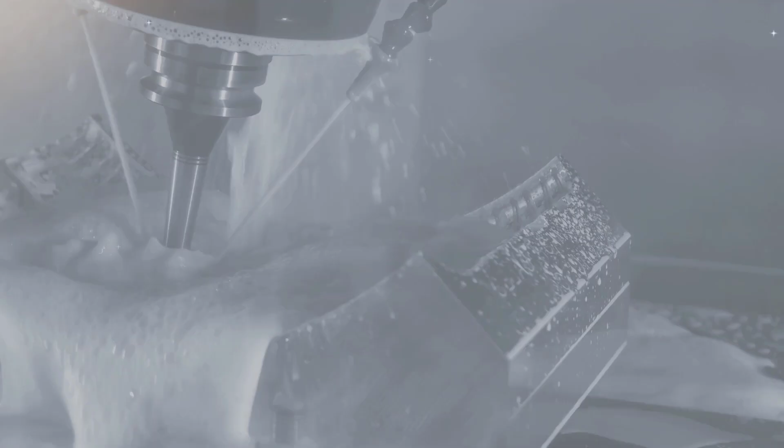My name is Stephen. Today we're going to explore the power of 5-axis machining in GibbsCAM. Let's get started. We're going to be looking at the 5-axis module today for simultaneous machining in GibbsCAM. Let's open up a 5-axis process to start.

Before I create a toolpath, we'll just look at the process dialog for the 5-axis module. This is the options tab. It has your speeds and feeds, and you can duplicate and rotate toolpaths, which CS you're going to be machining in. GibbsCAM 5-axis supports 3D cutter radius compensation, so you can adjust the toolpath at the machine for size.

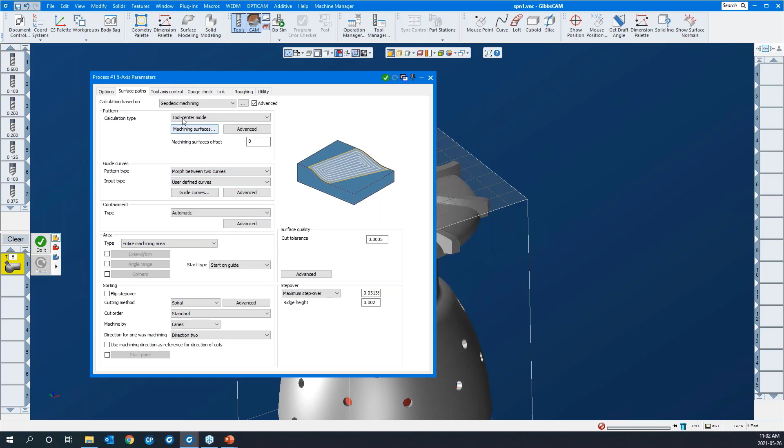If I click on the surface paths, you'll see that GibbsCAM is very graphical in the 5-axis module. Any field I click on, a diagram appears to let you know what the system is expecting. And that's right across the board, almost any field you click on. So it's very graphical, and it's a joy to use.

Okay, you'll notice I'm in tool axis control, and we'll be machining in full 5-axis simultaneous. You can also go 4-axis simultaneous, or you can lock both rotary axes and machine in 3-axis as well, in XYZ. So we'll be looking at that as well.

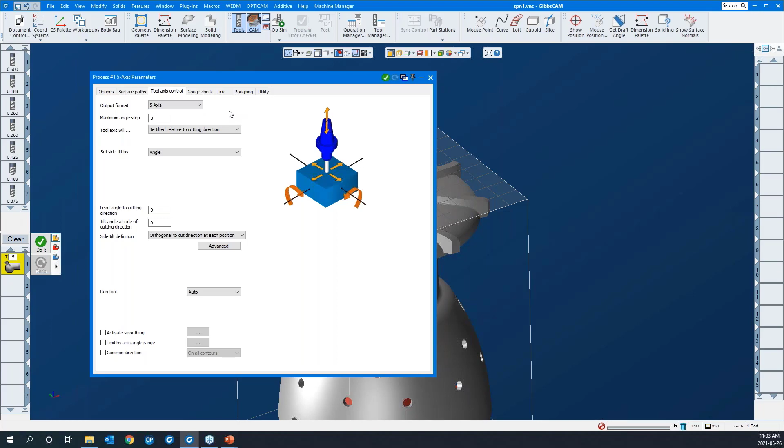Also, there's a lot of power to the 5-axis simultaneous machining strategy in GibbsCAM, and a lot of depth to it. If I just go over my calculation based on, if I'm selecting surfaces, there's a series of sub options here for different toolpath options.

If I select triangle mesh, you'll see there's another subset of toolpath options. And if I go to wireframe, you'll see likewise. So there's very many options here, okay? And we're going to cover a few of them here today.

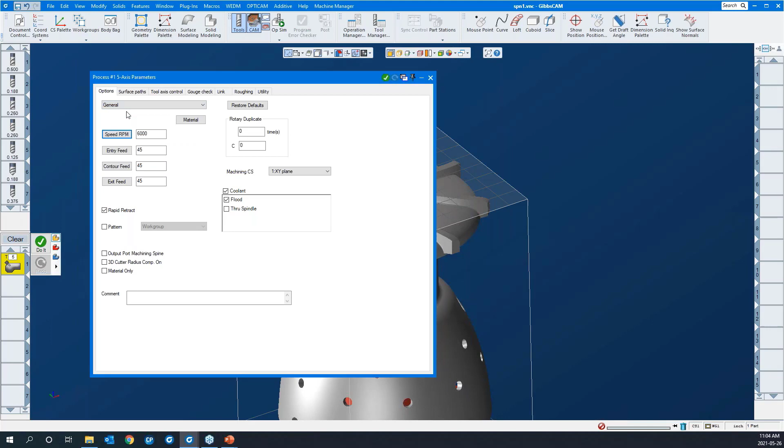If I go back to options, you'll see there's a whole other set of toolpath options here as well. There's point 5-axis strategies, and we'll look at least the drilling one today. Let's go ahead and create a toolpath. Okay, so our options tab is good.

We're set like this. I'll go to surface paths, and I'll select surfaces to start. We'll go morph between two curves. I'll just select the first curve like so. And I'll say, okay, the second curve

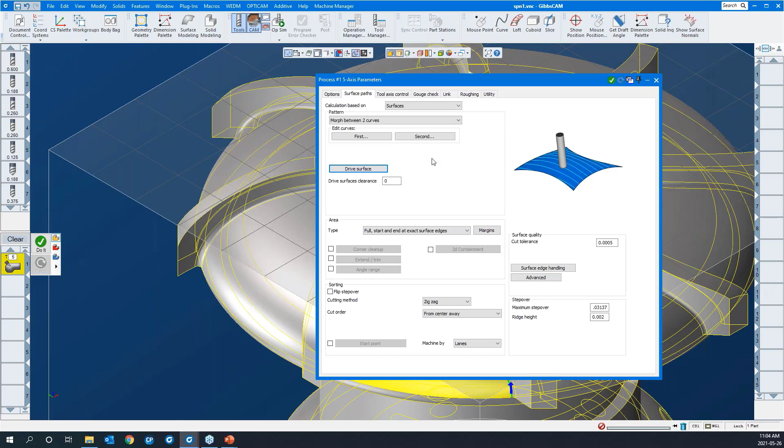will be in here. And then the drive surface, the surface we're actually going to be machining, is this one. So those morph curves are containing the toolpath, and we're going to be machining onto the yellow surface here. Start and end at exact edges, meaning the tool is going to travel right up to these morph curves that we've selected. But if we did that, it would perhaps overcut.

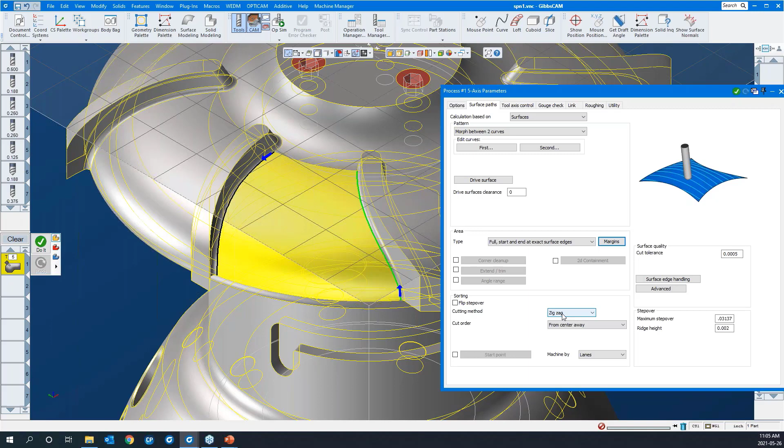So we can go to margins and add the internal tool radius, which is the radius of the tool we're using, which in this case is an 1/8" ball mill. So that'll shift the toolpath over by that amount. We're going to cut a zigzag toolpath, and we'll just use a standard. So it'll go from the left or right based on our decisions.

There's the machining tolerance. We'll keep the step over rather coarse while we're developing toolpath. It'll calculate quicker. And once we're happy with the toolpath, we can tighten up our step over to create a nice surface finish. In tool axis control, we'll select full 5 here.

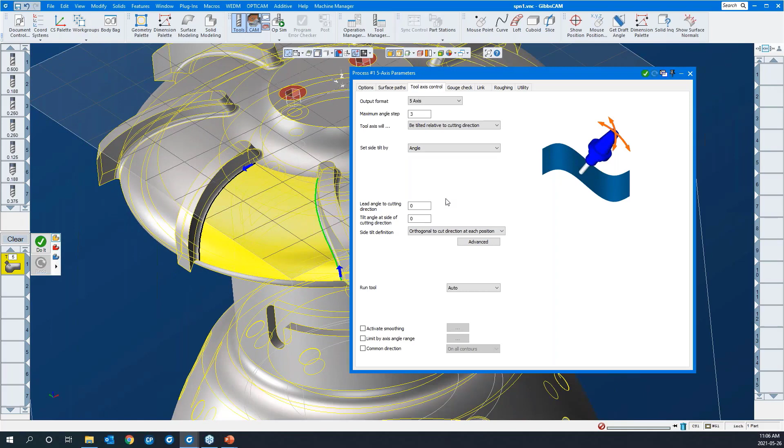There's dozens of options to control the tool axis in relation to the surface it's cutting. By default, the tool axis wants to stay perpendicular to the surface it's cutting. And for many reasons, you can alter that by adding a lead or a lag angle or a side tilt as well. And we'll discover them as we go.

The gouge check protects the part from the flutes where required, or the shank of the tool, or the arbor as well. We'll come back and look at that where required. We typically only apply gouge check strategies once the toolpath is created and we see that there's a problem, when we need the tool to move away from any given feature.

The link tab is a very important part of the 5-axis module. These are important components of the toolpath. This is our first entry and last exit, okay? So the lead in and lead out. Gaps along cut are very important, okay? What is a gap along a cut? Well, this diagram kind of displays that.

And so if the system encounters a gap, do you want it to go direct or follow a surface, or it can blend the spline, or it can start retracting to different feed or rapid moves as well, okay? And then you can differentiate between a small gap and a large gap and have the system behave differently based on those. Another one that's quite important is these links between slices.

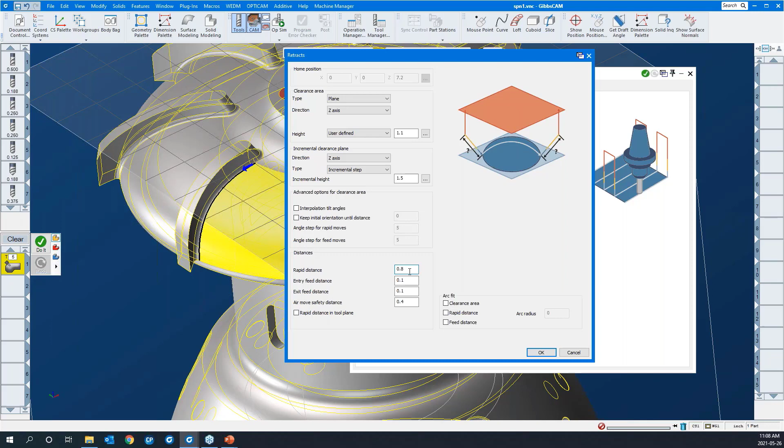Okay, again, you can differentiate between a small move and a large move. A small move, you may just need to follow the surface, but if it's a longer distance, you may want it to retract to a clearance area. So there's many different retract options, and they're all defined in here, the retracts, okay? There's clearance area, which is the initial clearance plane. There's also a rapid entry and exit, and then a feed entry and exit, and then a rapid distance here as well. Okay, and we'll explore these as we go forward.

There's also a roughing tab. By the way, in the link tab down here, links between passes, you can do multiple passes, and then the same options appear here for how to get the tool from the end of the first pass to the beginning of the second. It's grayed out right now because we don't have any roughing strategy selected. If we come here to roughing and click any one of these, go back to link, you'll see that it wakes this up. You can see the different pass levels here.

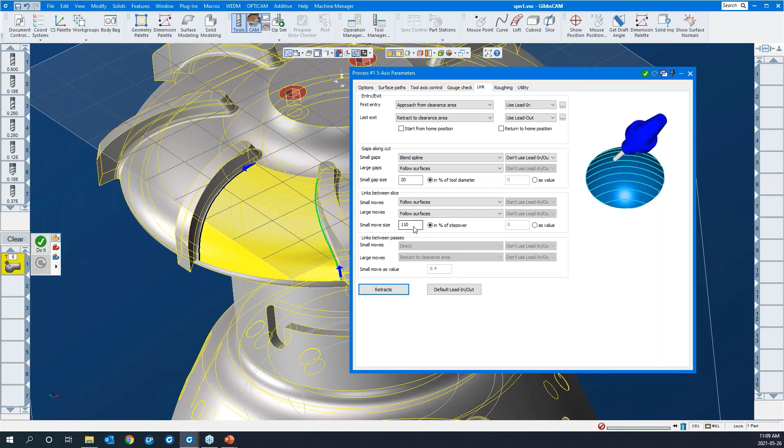Okay, so to create our toolpath, we have our edges selected. Yep, like so. We're taking 50 thou step overs. Our tool axis control was full 5. We had no gouge check strategies on. Our link tab, I was going to go links between slices. I was just going to say follow surface and follow surface in both instances. Let's go ahead and create that toolpath.

Okay, down here in the lower right is the progress bar. There's a little thumbtack there. I like to keep this open during my session so I can see how long it's taking for toolpaths to calculate. Okay, so there we are. You can see there's the shift from the edge. That's the internal tool radius.

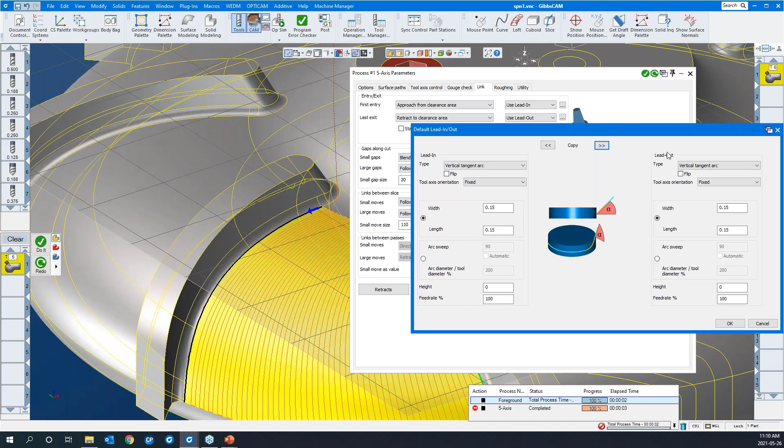We have a lead in and lead out option selected here, so I can modify those. If I go to the link tab, yes, we're using lead in and lead out. If I go to my default lead in and lead out, I can modify them here. Vertical tangent arc, I'll make them a little bit bigger like that, and I'll shift it over to the lead out just by clicking that button. I'll say okay, and we'll just hit the redo button. Okay, let's run the simulation here and have a look-see.

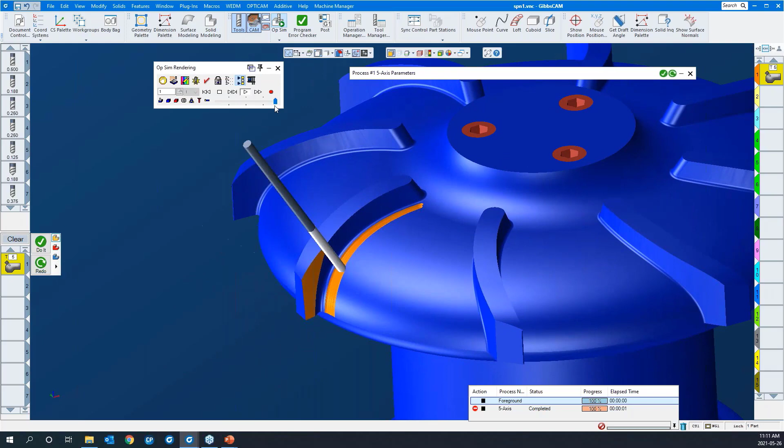And away we go. Okay, so this is OpSim right here. You can see right out of the gate that it has offended the blade there. Okay. And the step overs are rather coarse here. While we develop the toolpath, I'll keep the step overs rather coarse, and then we'll clean them up as we go. We'll see how it behaves coming up to the side of this blade here. Okay, so it seems to be clearing that one. This is our problem right now.

So we'll add a gouge check strategy here. I'll go to gouge check. I'll select it. I'll check the flute and shaft. Okay, there's three main gouge check strategies. Retract tool. You can retract the tool along the tool axis, along any of the machine axes, or from any reference point you choose. It's quite versatile that way.

Okay, the next main one is you can tilt the tool. You can use a side tilt, which is a tilt angle perpendicular to the travel of the tool. Or you can use the lead lag angle, which is along the length of the cut as well. Or you can let GibbsCAM take over and say, do automatic. Well, in our case, we'll go side tilt. We're gonna have the tool tilt perpendicular to the direction of cut. Okay, the parameters are, you can limit it to a maximum of 90 and minus 90. We'll just leave that as it is.

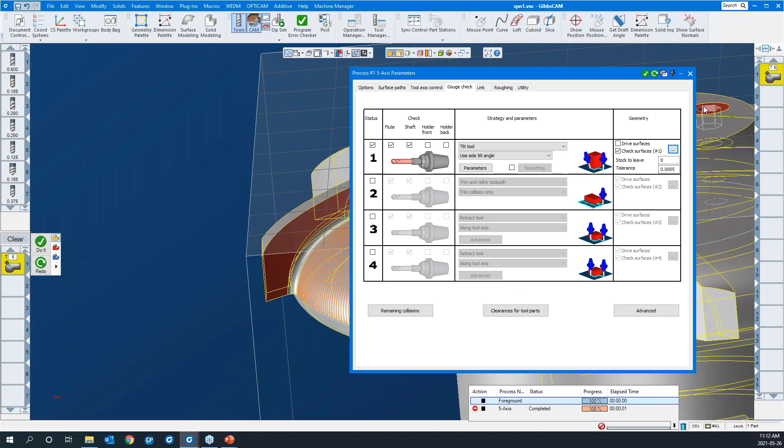What surface are we gonna check? I'll just pick here and select the surface we wanna protect, is that one. We'll say okay. And we'll leave an amount on there. We're gonna have it miss by, we'll say 50 thou. I'll say redo.

And you can see there's a little jog in the toolpath, and let's look at the simulation. See how that behaves. I'll slow it down a little bit, hit play. So it comes down and you can see the tool is actually missing there. Okay, while it's running simulation, you can single block it at any given time. You can put the tool holder on there as well.

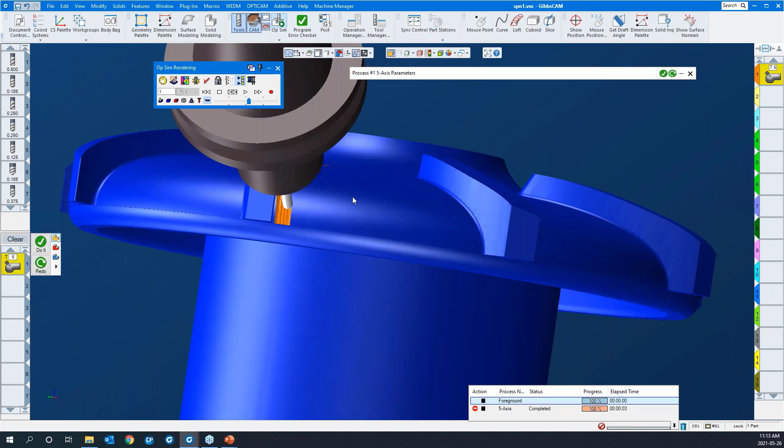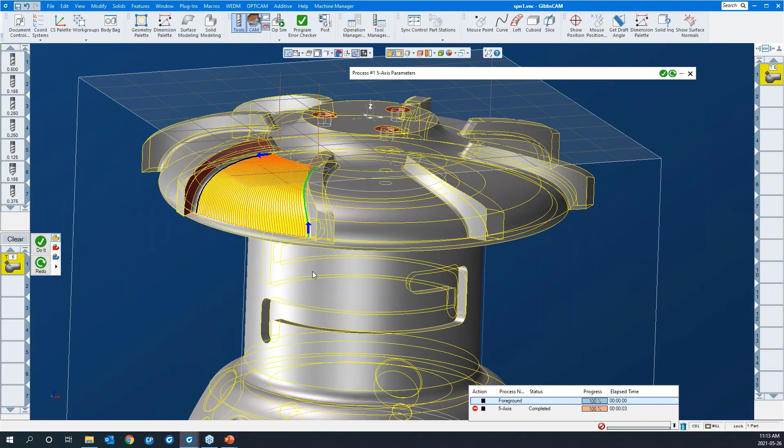Okay, and as we go through and I show you the 5-axis, I will describe some of the features available in OpSim and in machine simulation as well. Okay, so we're milling with the end of the tool here. A lot of the 5-axis module is end milling, but there's a very important component to 5-axis, and that's side milling. Swarf milling they call it, side wall axial relief feed. So let's do that. We will side mill one of the blades here.

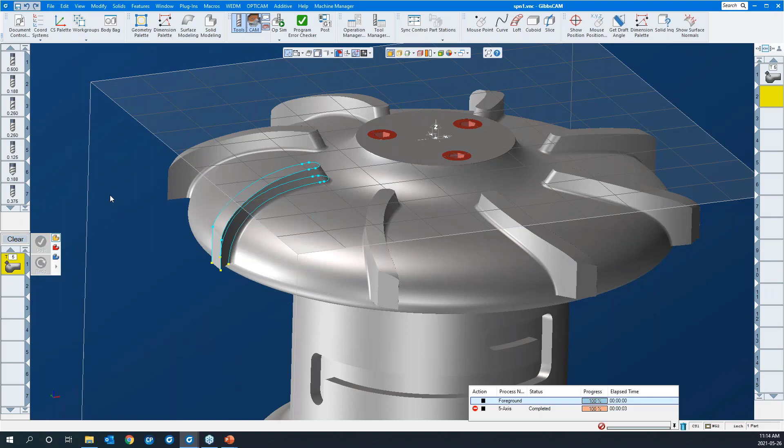Okay, in this last toolpath, I used the edges of the solid to select. You certainly can do that, but you can also use geometry that you have extracted from the solid. And I can do that in this case here. I'll create another 5-axis strategy. I'll use the same tool. Cutter comp is on by default. I'll turn it off until required. Surface paths. This time we're going to go swarf milling.

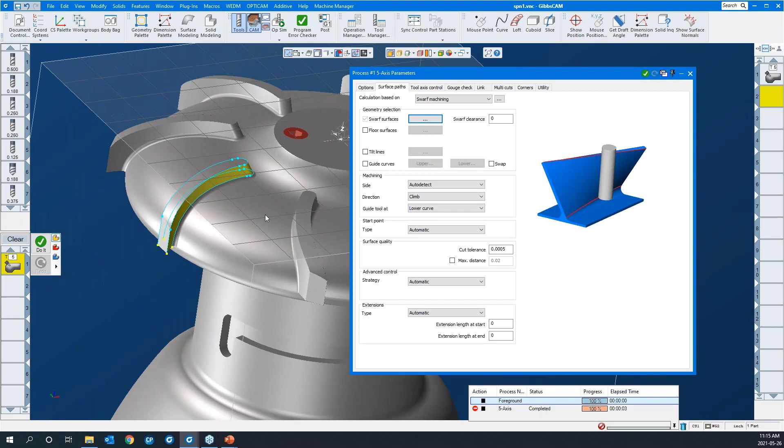Our swarf surfaces will be the walls of the blade. This one. Like so. I'll say okay to that. Okay. We'll use guide curves, which is the geometry. The upper curve will be the one on the top of the blade. And the lower will be this one. Okay. I'll say okay.

The system will auto detect which side of the surface it should cut on. It's going to guide the tool at the lower curve. The start point is predetermined. We can change that. There is our machining tolerances again. That affects the quality of your toolpath. Advanced control, we can let it go automatic, or in this case, we're going to sync the toolpath with the upper and lower curves. We can add an extension on the beginning and end of the toolpath.

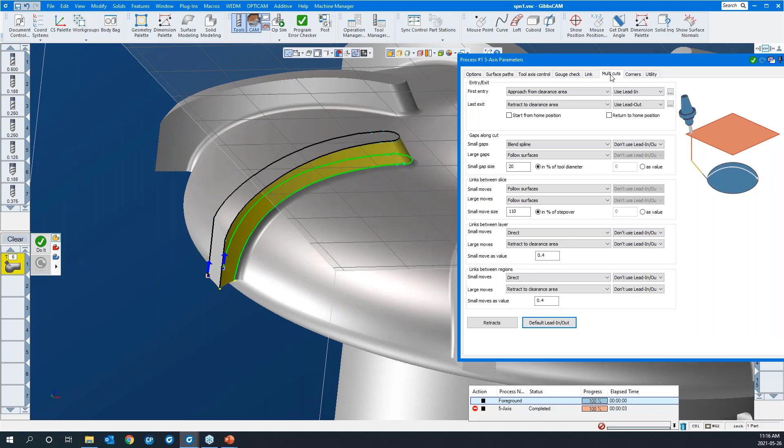We'll look at that. Under tool axis control, full 5, yes. Gouge check, we'll just leave it as it is. It's going to check the guide curves already. Okay, there's a lead in and lead out already defined here. We can remove them. If we say no lead in, lead out, you'll get an axial entry and exit. So just a straight line in. And you can do it in multiple passes. We're going to do it in one pass here. I'm going to say do it.

Like so. There's a clue when you're developing 5-axis toolpaths on the entry and exit line. These lines right here. With a bit of practice, you'll understand that this represents the axis of the tool. So it gives you a clue as to how the toolpath is going to approach and leave the cut. Let's have a look at this one. I'll just turn off the holder. Sometimes it's nice to have it. Other times it might impede your view a little bit.

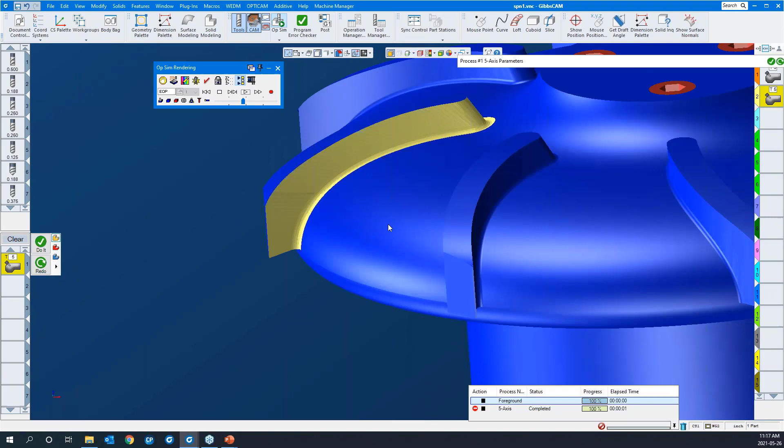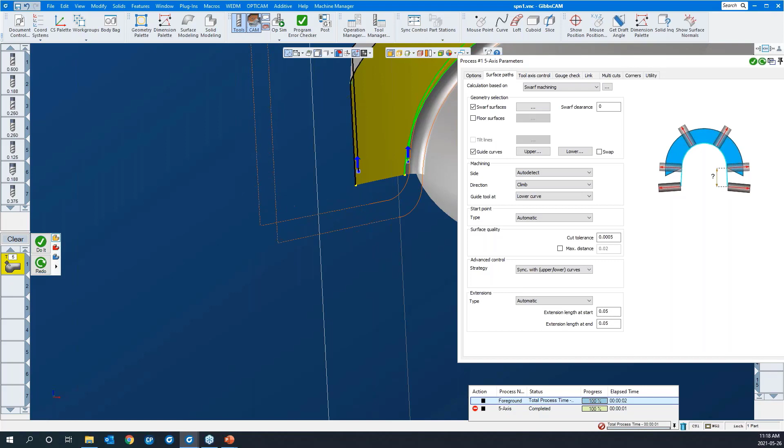Okay. You may consider extending the toolpath a little bit here. I'll go back to surface paths, extensions, the start and end. I'll extend it by 50 thou at the beginning, and that same 50 thou at the end. I'll just say redo. You can see the difference there. At any time, and I'll do it on the next toolpath, you can duplicate and rotate that around. There's no need to go around to each blade and do them separately. You do one and then you copy, rotate it around, like in other environments in GibbsCAM.

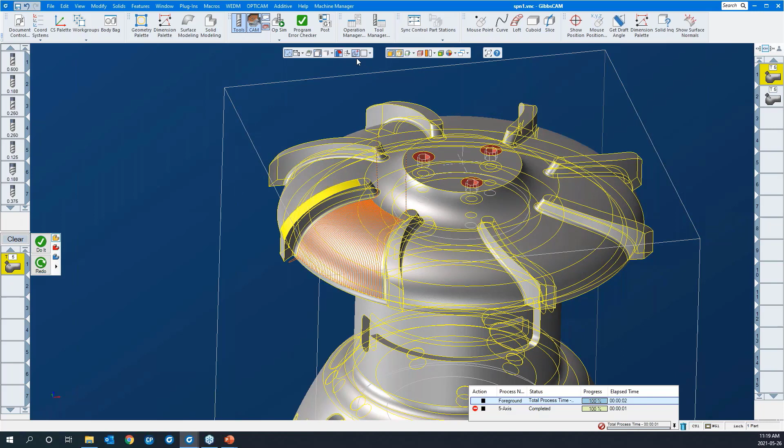Okay, let's go back to Op1. We were saying that it's a full 5-axis strategy, absolutely no problem. But you can also lock a rotary axis or lock 2. So let's look at reusing the data that we did for Op1 to cut the top of the blades. To simplify my view here, I can turn off the grid and the stock cube. Let's go in and modify the data in this process dialog to do some 3-axis milling. It's basically going to be a 3D toolpath option, XYZ. I'll go to surface paths.

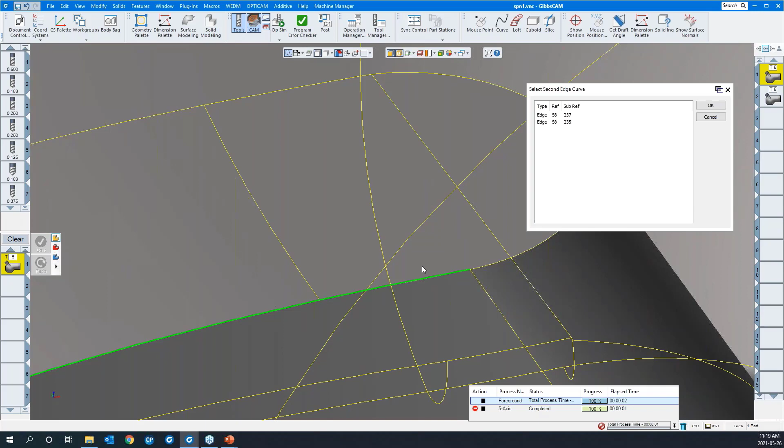And we'll select morph between 2 curves. Yes, the first curve will be this. And I'm picking wireframe from the solid again. The second curve, this one. Like so. The drive surface, or surfaces in this case, will be these 2.

We'll start and end at exact surface edges, except this time I'll remove the margin option so that the tool does go right to the edge and doesn't stay off it by the radius of the tool. I'll say okay there. We're zigzag machining. I'll set the step over to 25 thou. So you can do it by step over or by ridge height for surface finish considerations there. One drives the other.

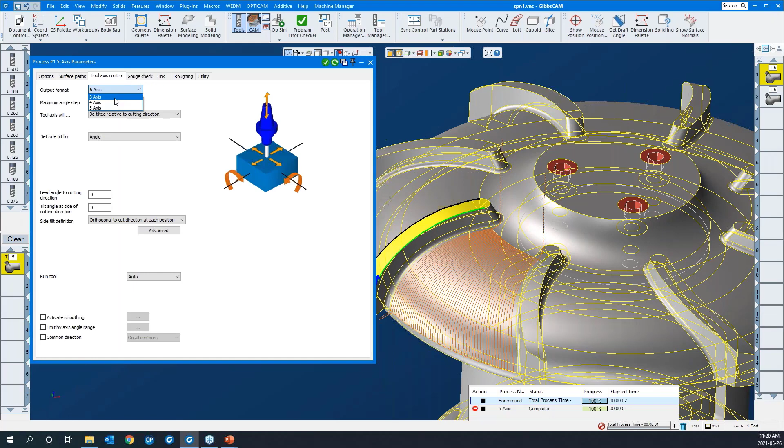If we go to tool axis control, we're going to take it down to 3-axis. If that's the case, you can machine from the XY plane. Or if you click other direction and you have a coordinate system created, you can pick the CS that you want the tool to approach from and cut on using this one. So in effect, it's 3+2 machining or 5-axis positional milling. We're going to go by the top, which is the XY plane, or CS number 1.

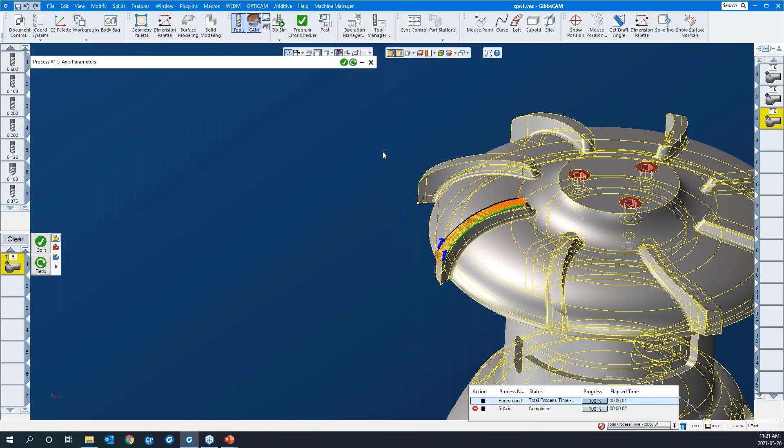Gouge check, until we need it, I will turn it off. The link tab, again, we'll leave them as is. We'll create the toolpath and come back and modify as required. At this point, I'm going to create the toolpath. I can watch it run here in my progress bar. It ran rather quickly. And you can see our toolpath here. First of all, you see that the tool is now exactly on the edge.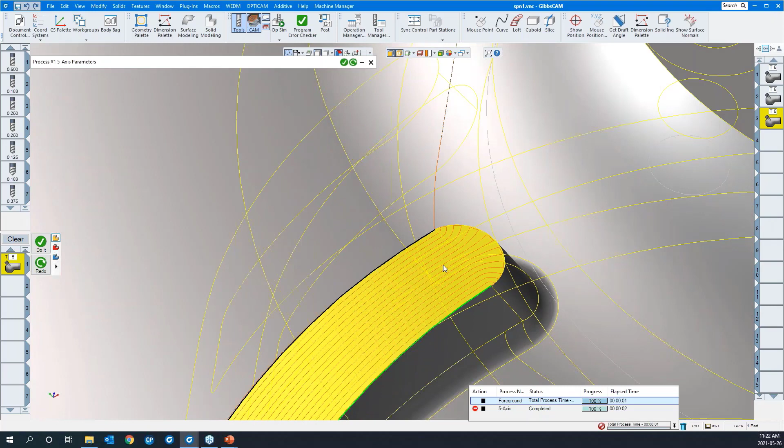I see a problem here where once the toolpath leaves the containment of these morph curves, the toolpath starts to flare out like that. So what we can do is we can virtually extend the morph curves to the end of the selected surfaces. So if I go to surface paths and surface edge handling, extend edge curve, and I'll say okay, and say redo. Okay, so that straightens that up pretty nice. If I go to a top view, we'll get a good look at that.

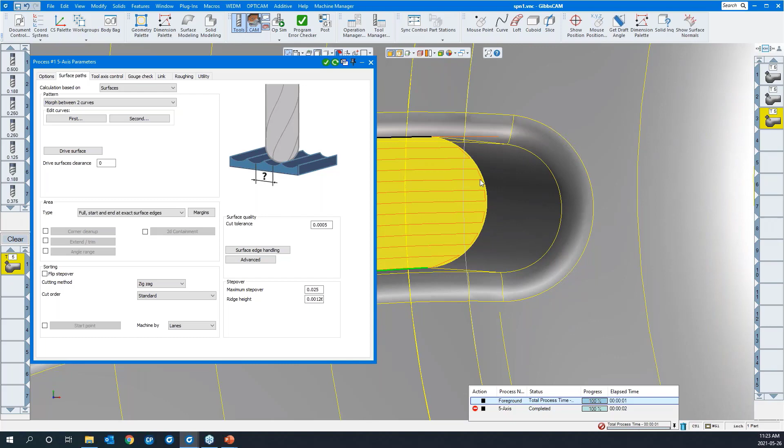Some other improvements are these are the links we were talking about. They're important components of the toolpath. And you can see that there's an abrupt change of direction there. So we would rather, where possible, have a nice blended curve in there. So if we go to the link tab, and knowing that there are links between slices, instead of following the surface exactly, we'll say blend spline in all cases in this toolpath. I'll say redo. You'll get a nice rounded curve there.

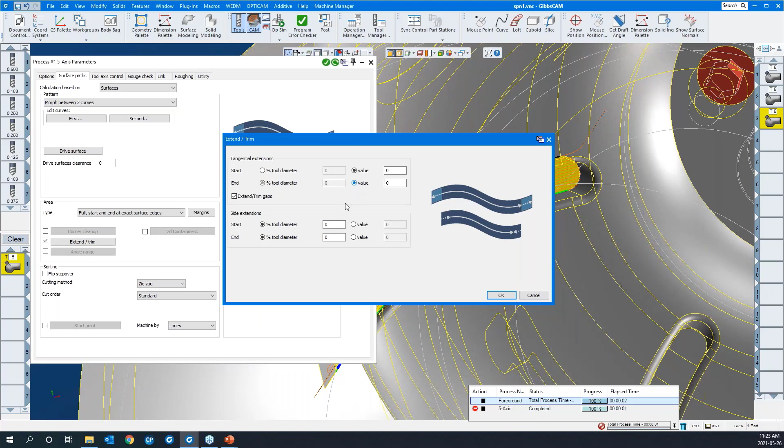One last thing you could do if you wanted, just for safety's sake, is have the toolpath push out beyond the surface. In surface paths, you can come to extend trim, and I'll extend the stroke of the toolpath. This is along the stroke. This is across the sides. Along the stroke, I'll extend it by 25 thou on both ends. And say redo. Okay, so it just pushes it out there a little bit. I'll go to a nice ISO view.

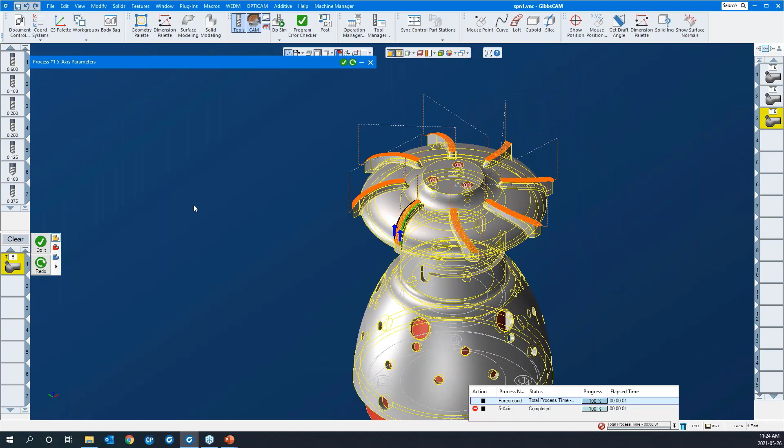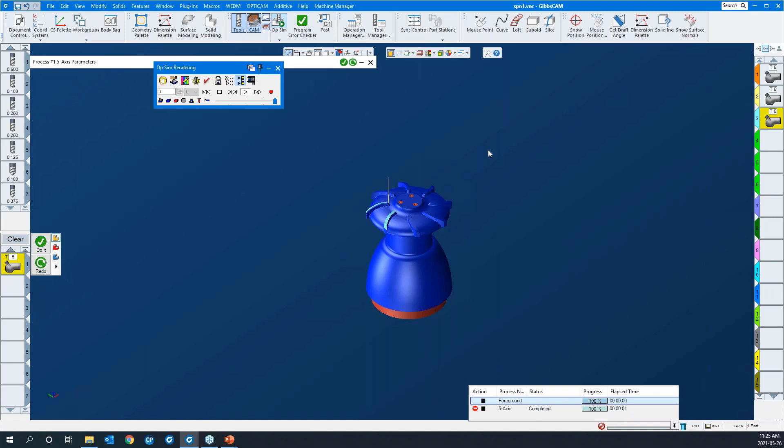One more thing we can do here is I'll go back to the options tab, and we can duplicate this toolpath 7 times over 45 degrees and say redo. Like so. I'll just run the simulation again. And hit play. Away it goes. Of course, I would do that at the end to all of our operations so that the entire part was cut. Okay. I'll turn off edges here.

So we've been creating toolpaths from scratch here. We've been building them up. In GibbsCAM, we have the ability to save these processes off. We can save all of the manufacturing data in here, your speeds and feeds, the different toolpath parameters. It also saves the tool off. So it's suitable for similar parts. So if we were cutting similar parts, we could have a series of processes available for that. So we're going to use those, and it'll just speed up our toolpath creation.

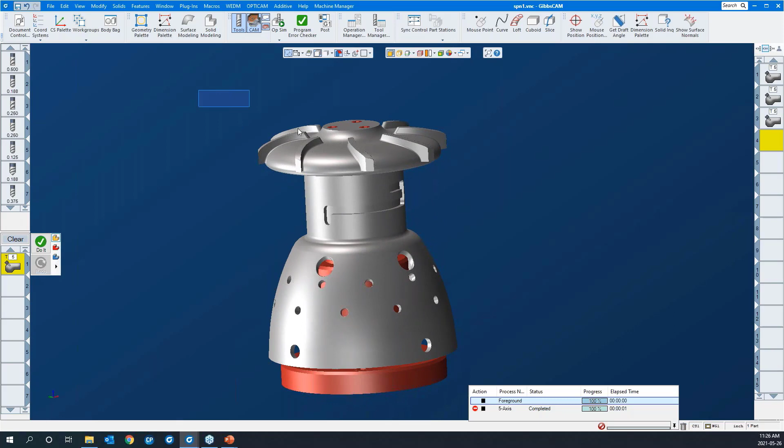Okay, we're going to look at this radial slot here. This is a 5-axis machine. It has full 5-axis on it. However, if we were to rotate the part along the trunnion axis 90 degrees and access this slot, in a sense, we're now on a 4-axis mill. Although this is 5-axis, this certainly can be done on your 5-axis or your 4-axis vertical mill, or horizontal for that matter. Okay, so I'll load a saved process. I'll go load process. And I have one here called Multiaxis Rough.

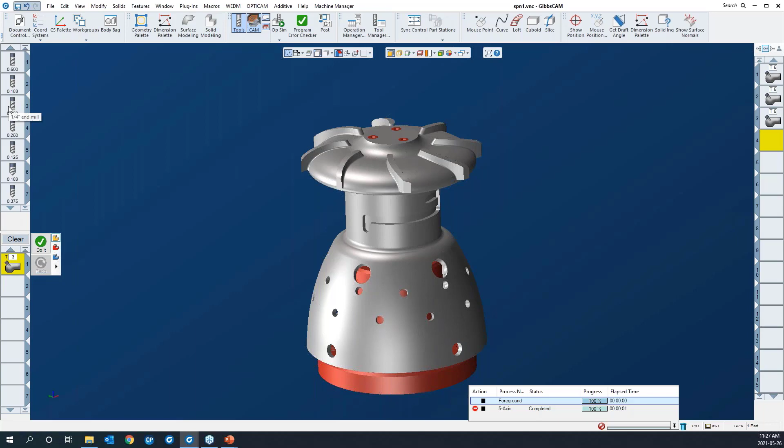We'll let it load up. It's using T3, tool 3, which is a 1/4-inch end mill to cut this feature. We can measure the width of this slot rather quickly. I'll just measure across the width of the slot, and the slot's 3/8. So our 1/4-inch tool should fit the bill for a very quick and effective roughing strategy here for some of our 4-axis work.

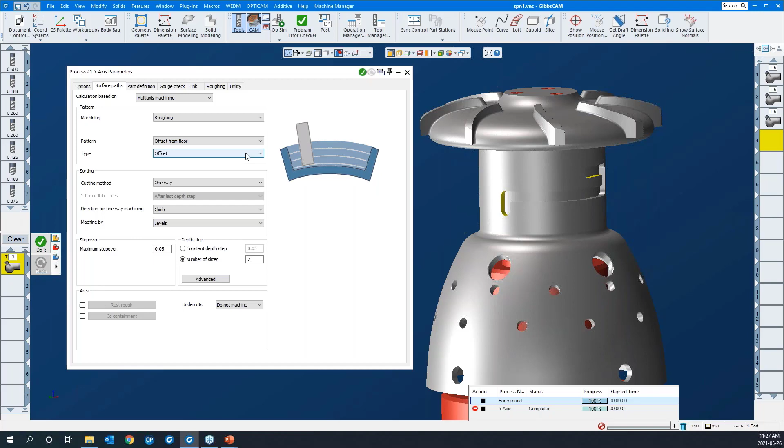We'll set our speeds and feeds. I'll go to surface paths. Okay, we're multi-axis machining here. We're roughing, which is interesting. In many of the options within the 5-axis module is the offset milling, which is typical roughing. You know, it also supports adaptive roughing.

With all the high-speed machining ability of other high-speed machining strategies, such as all the curves and the corners and the micro lifts and like that. So you can do some effective roughing. In this case, we'll stick with offset milling. We're going to cut one way. We're going to climb mill. The step over will be 50 thou step overs, we'll say. Number of passes, 2.

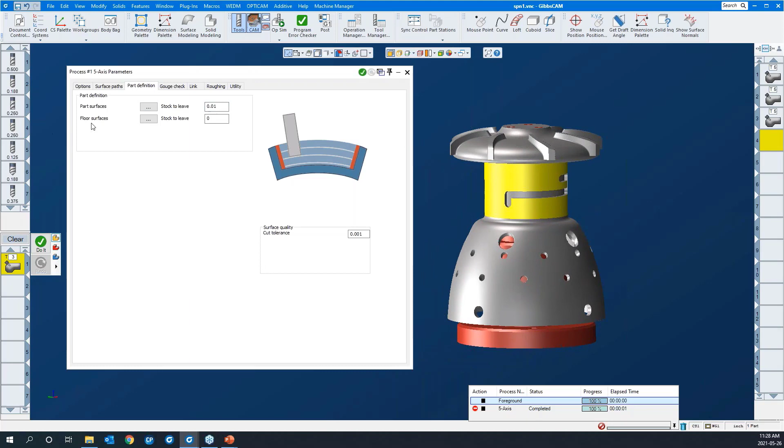Okay, let's define the part. The part surface will be the cylinder that we're cutting. Okay, that defines the boundary of the feature we're cutting. I'll say okay. We're going to leave 10 thou on all surfaces there. Our floor surface, I'll pick it and say okay. Gouge check where required, link tab.

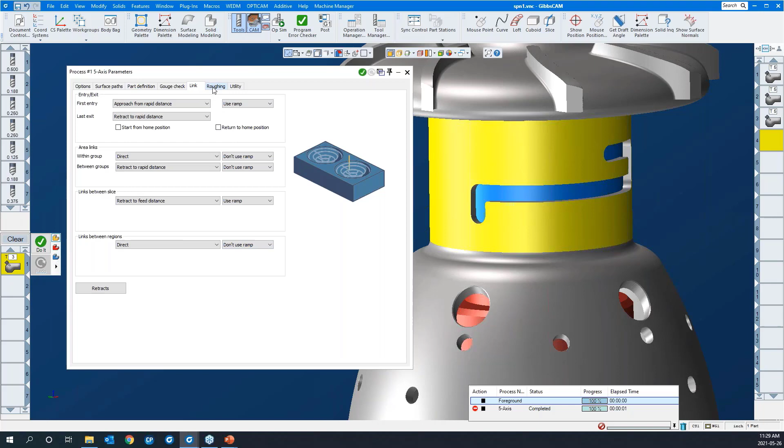Okay, we're going to have to gain entry to this slot. So we'll use a helical ramp in. Before I define what gets ramped in, I'll go to the roughing tab. We'll use helical. We'll say a 2-degree ramp angle, and we'll use 25. The helical diameter will be 25% of the diameter of the tool we're using.

Knowing that there's 2 Z depths or 2 passes that it's going to have to cut. The initial cut depth, we're going to use that ramp, yes, and links between slices or passes here, we're also going to use the ramp. I'm going to say do it. Okay.

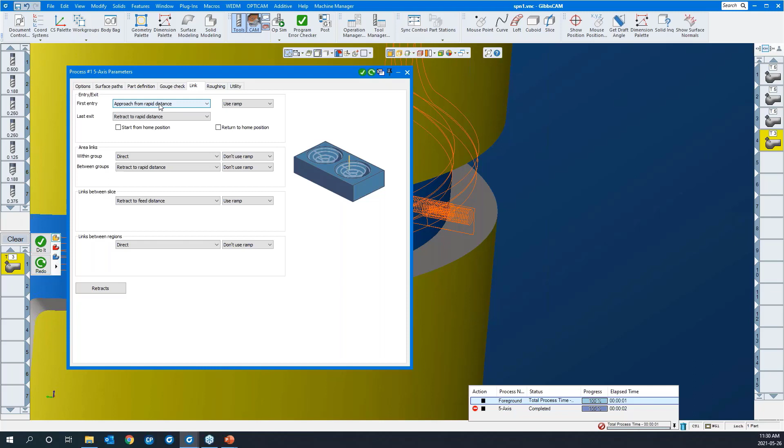So it's using the ramp, and then these distances, we want to keep them pretty tight. The initial one's using the rapid distance, and this is using the feed distance. So I'm just going to make sure that they are close to the part, but still clear. Okay, I'll create a finishing cycle here, and then we'll run these 2 operations in simulation.

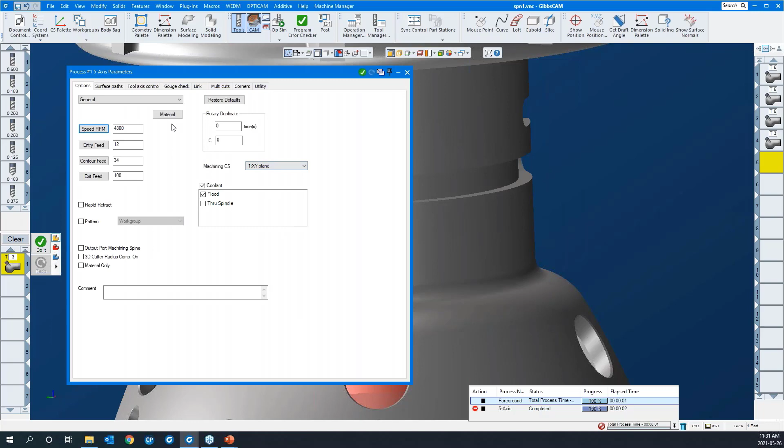So like we did 5-axis swarfing, we can do 4-axis swarfing here as well. I'll swarf the slot with a 4-axis process here. I'll go to surface paths. The swarf surfaces will be the walls of the slot. I'll go select tangent faces and say okay. Floor surfaces, yes.

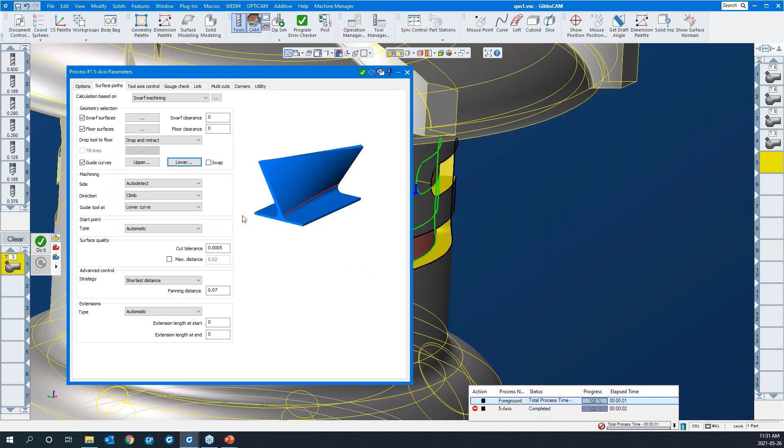And then guide curves. For that, I'll turn my edges on. My upper curve. The lower curve. Okay. In this case, we'll go advanced control. Instead of syncing them, we'll go shortest distance here. Tool axis control, fourth axis. When you select the 4 axis, then you have to tell it where the rotary axis is, and it's along the Z axis of the part.

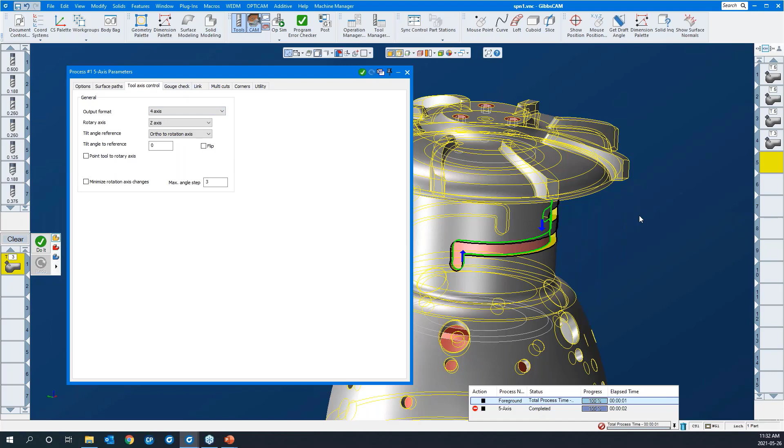So we're good there. Okay, this is going to go off center Y. And that's a big question when you're doing 4-axis milling. Of course, the 5-axis module supports off-center Y machining. If you wanted something more like polar and cylindrical, where the tool always pointed to center, the button for that is right here. If you clicked on that, it wouldn't effectively machine this feature.

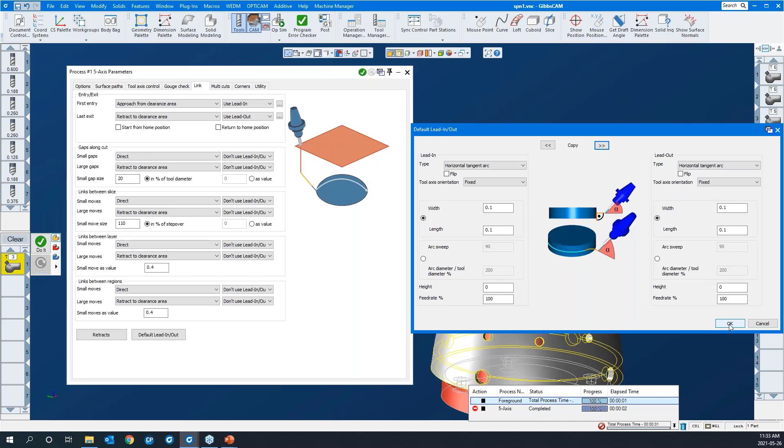Multi-cuts. This is a finishing pass. We're going to do it in one shot. And we just want to make sure there's an effective lead in and lead out here. So yes, we're going to use them. We'll go with a horizontal tangent arc, and I'll copy that over to the lead out and say okay. I'll create this toolpath.

Oh, okay. Let's run both of those in sim mode. Okay, so as you see right now, when I run OpSim, the tool rotates and the part stays fixed, something like that. I'll put the holder in and hit play. So there it's helixing in to depth here, okay. So you see that happening.

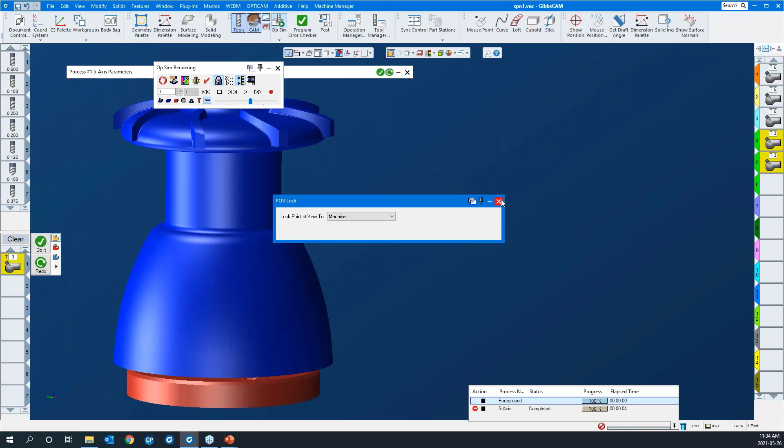If you want a more realistic view of how it's going to appear at the machine, you can change the POV lock here from fixed part to machine. Okay, and then we'll run it again, and now the tool will remain fixed and the part will rotate. There it goes.

Okay, at any given time, there's a show position dialog in OpSim that's kind of interesting. You can click on this, and there's sliders to control. I can lift the tool manually in Z, lift it up out of there. And then I can determine my B axis is the rotary axis, and the A axis is the tilt or trunnion axis here.

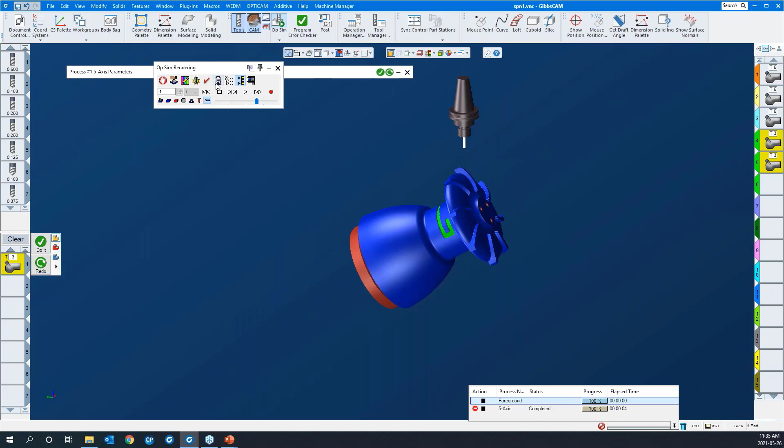Okay, while we're doing all this, there's full collision checking. If the tool rapids into any material, that's considered a crash. If the tool holder touches anything, that's also considered a crash, and the simulation will warn you of that. Okay, so I'll take you into the next toolpath. We'll have a look-see, and we'll use not operation sim or OpSim. We'll use machine sim.

Okay, let's get ready to create a new toolpath here. I'll turn off my edges again. So we're going to do some 5-axis drilling. Okay, these holes here. We know nothing about them right now. We can just study the solid. So in combination with the 5-axis module, we can use the hole manager. So I'll select the entire model, and I'll run the hole manager here, turn it on.

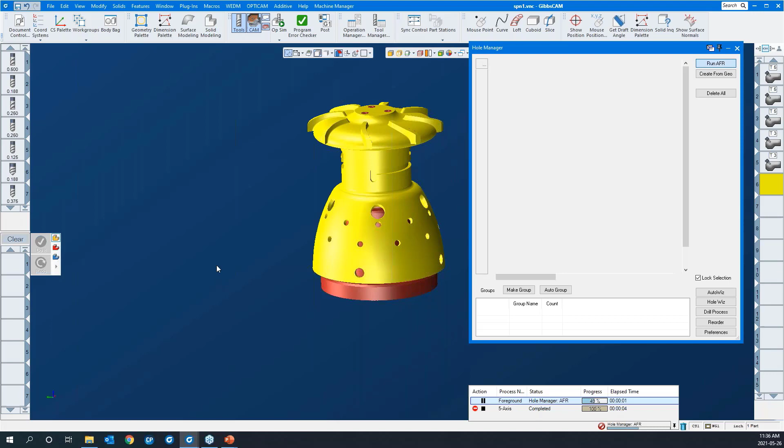And we'll run auto feature recognition and give it a moment to go through the model. Okay, and it's identified them all. There's a hole feature for every hole now, okay? Some of you who use GibbsCAM may already use this feature. We're gonna use it in combination with the 5-axis drilling.

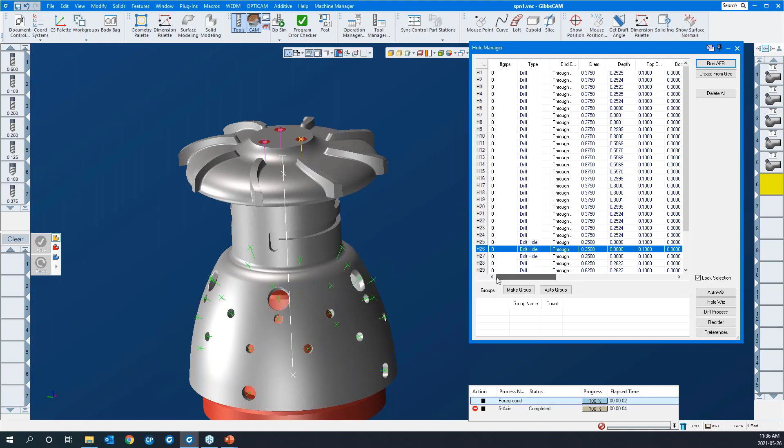If you wanna find out about something, you just click on it, and it tells you right here, oh, this one's a bolt hole. If you want some specific data about it, you can right click on it and go edit hole. You can see it's built from 2 segments. They call it a bolt hole, or a counterbore hole. Yeah, like that. There's a series of other ones in here. We can group them together now and then toolpath them all at once, drill them or what have you, all at one time.

So I'm going to group them by diameter. So I'll select, let's see, I'll grab this 3/8 hole and the rest of them. And I'll say make group. I'll just give it a name, something descriptive, something like that.

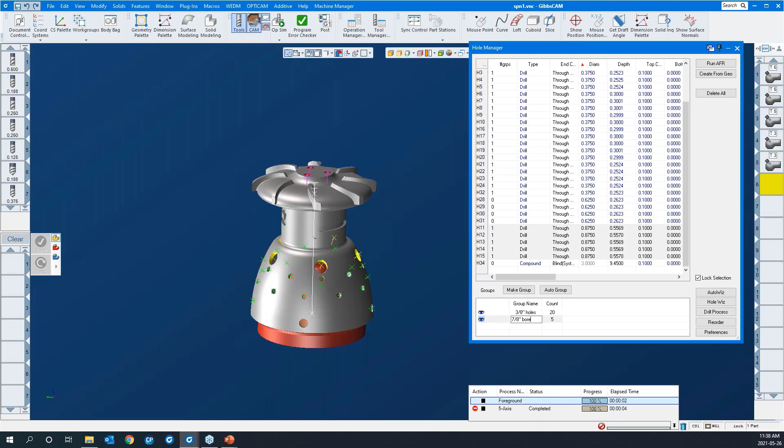What about these ones here? There's these bigger holes here. You can pick on them. Diameter .875, so they're 7/8 diameter. I see 5 of them that are the same. So I'm going to group them as well. Give them a name. Okay, so we're all set to go. When you need to select them, you just pick them by group. They all highlight. So we're good to go.

I'm going to build up a process, grab it from our saved processes. I'll go with helix bore. So all of the drilling options that are available in the drilling process in GibbsCAM are available in 5-axis drilling as well. Okay, so we're picking drilling here. Under drilling options, we have our drill, mill bore, tap, rigid tap, your pecking options, so on and so forth.

Okay, we're going to go helix bore in this one. We're machining from the feature, so we'll be using the data in here. We want to concern ourselves with the bottom of that hole because we want the tool to break through the bottom. So if that's the case, there's some modifiers here. We're using the feature to create the toolpath. We're going to adjust so that the tool starts 50 thou above the feature and the entire depth breaks through the bottom by this amount to full diameter depth. Okay.

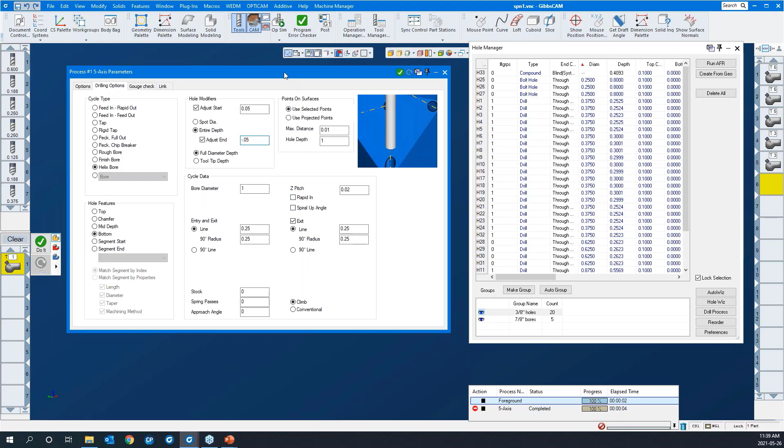There's Gouge Check and a link tab as well. Let's create the toolpath and see if they're required. I'll pick the 7/8 inch bores like so and say do it. It's as simple as that. Okay, it doesn't create a coordinate system. When we get to the drilling, it'll support drilling cycles as well. Okay, I'll do another one here.

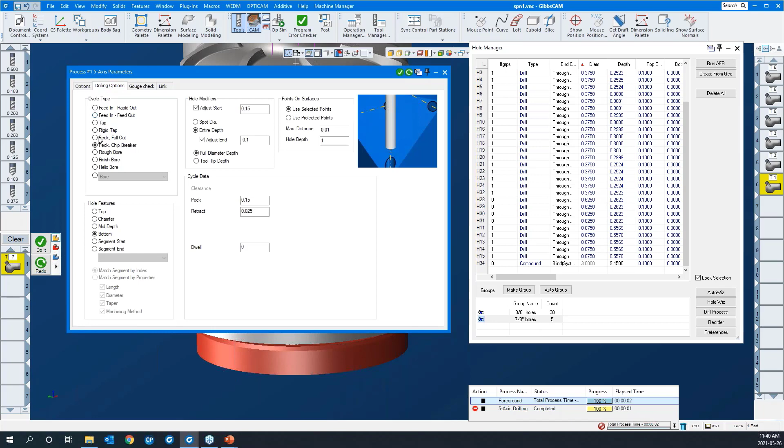I'll go load process list, and I'll peck drill those 3/8 inch holes. Okay. Let's have a look here. In this case, we're peck chip breaking. We're going to peck in by 0.15 inch, retract 25 thou. Again, we're going to make sure the tool drills through the bottom of the feature. There's an adjustment here as well, like so. I'll select the 3/8 holes and say do it.

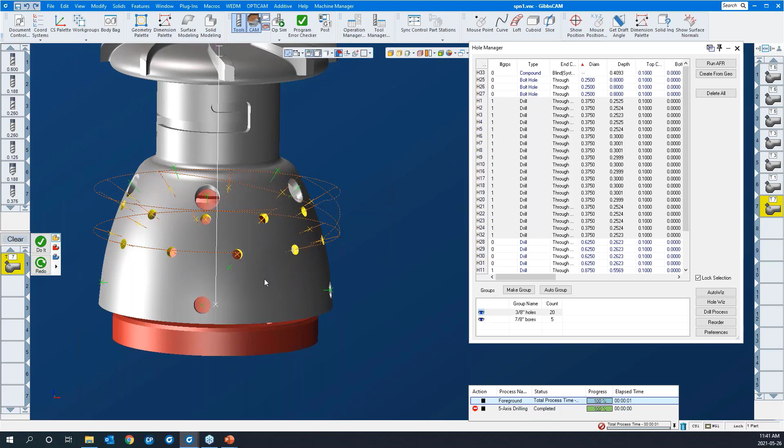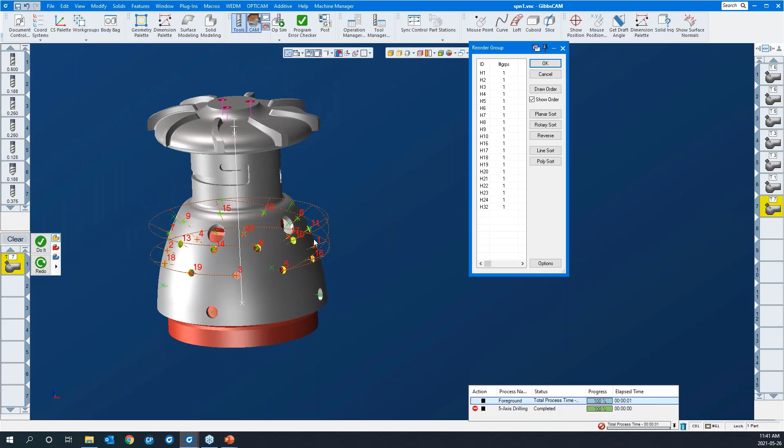So there it is. It's done in seconds, really. Okay, you can see that without running the simulation, the tool seems to be moving around quite a bit from hole to hole. There's not a lot of order in that. So we can reorder the group. Right now this is the order they're being done, basically in chronological order. You can show the label of the features like that. But what we want to do is reorder them.

So I'm going to use a rotary sort because we're rotating the part to drill these. We'll prefer a rotary direction. We'll go clockwise. We're going to sort it around the depth axis and say do it. Okay, you can see where it has reordered them here. I'll say okay, and we'll redo it. Okay, now you can see only one shift before it gets to the lower ones. Okay, so let's run that.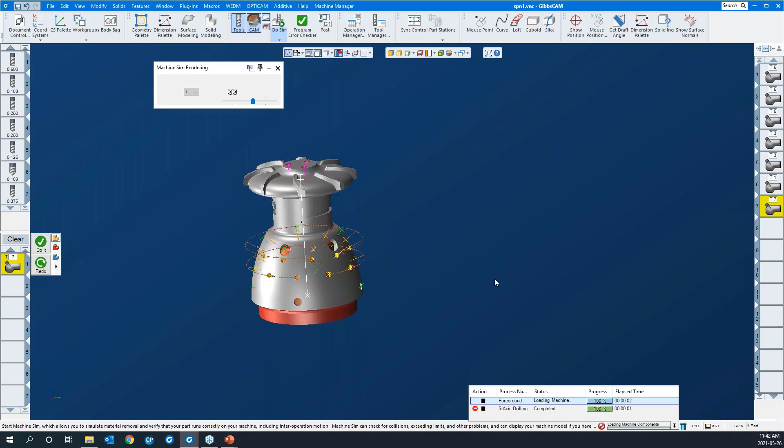I'll just close off the hole manager, and instead of OpSim, we'll go to Machine Sim here. I'll put selected ops on and hit rewind. Okay, it's getting ahead of me. There we go. I'll hit rewind. It'll reset the machine up. Yeah, like that. And I'll hit single block, I'll slow it down a little bit. Single block it. And away we go.

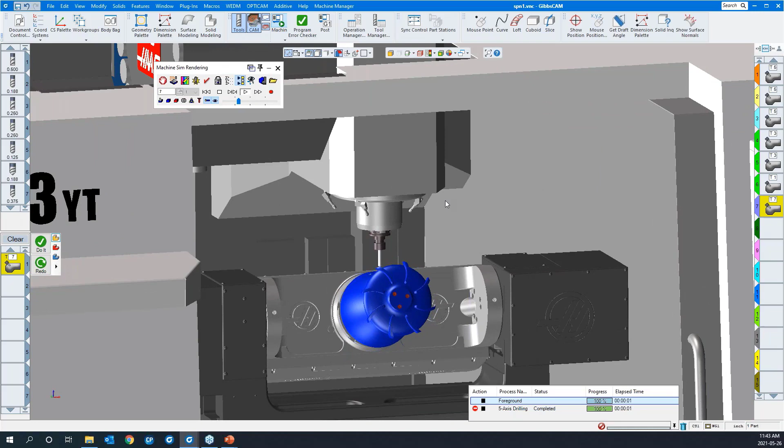Okay, so that collision checking we were talking about in OpSim is also available here, except it's checking much, much more. It checks the spindle against any component or the coolant nozzles. It checks it all. Like that. If I turn off selected ops, meaning run all of the operations, now I can just let that get going here and you'll see that it pops out. Yeah, like that.

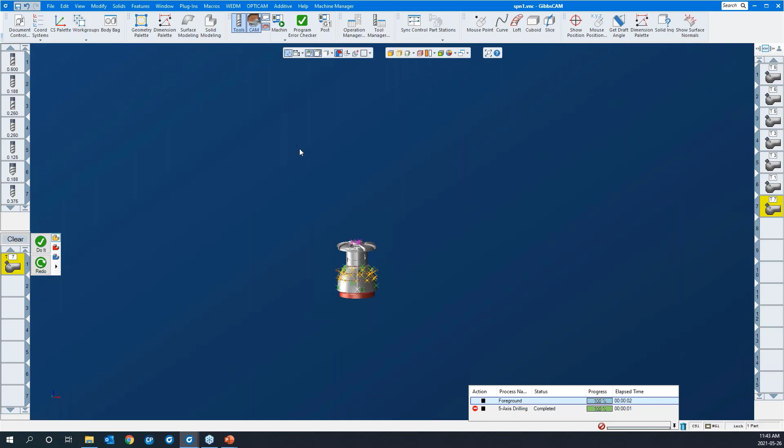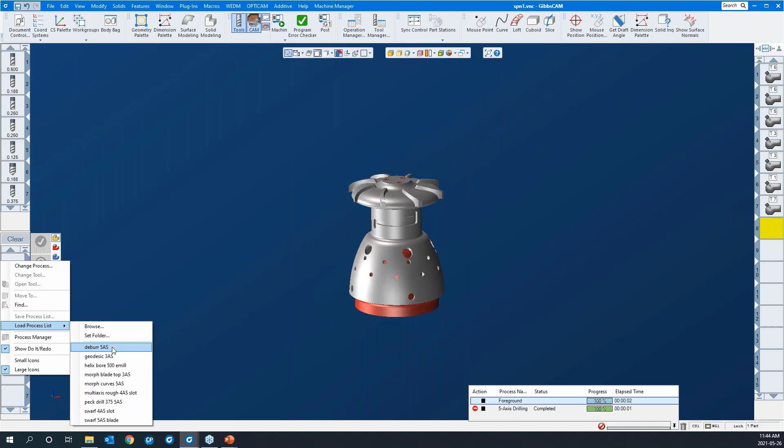Okay, there's a couple other toolpaths I'd like to show you. You'll keep these hole features, but along the floating taskbar you can just turn them off so that they're not visible. There's 5-axis deburring, automatic 5-axis deburring in the 5-axis module. Let's just have a look at that. I can pick the entire solid and have it go at it and then exclude edges or what have you. But what I've done is I've created a feature that defines the blades.

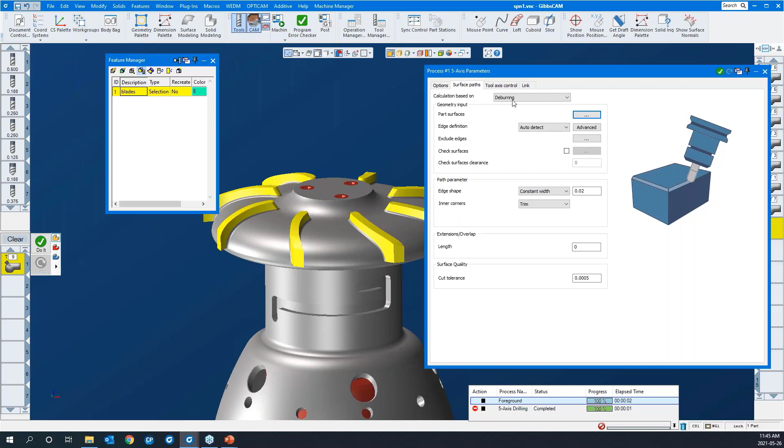So I'll open up the process dialog. Under surface paths, we're now deburring my part surfaces. I'll pick them. I'll open up my feature manager and just pick the blades. I'll say okay. You can exclude edges or check surfaces for fixtures, what have you. Here's the size of the edge break. I'll drop that to 10 thou.

Okay, for tool axis control here, we can just go full 5, which we are. But you can go 4+1, lock a rotary axis or the tilt axis and go. 3+2, as I was mentioning, for 5-axis positional milling. You can do it on a 4-axis mill, or just straight 3-axis if you only had a machine with no rotary axes. Okay, we're going full 5 here. It's as simple as that, really.

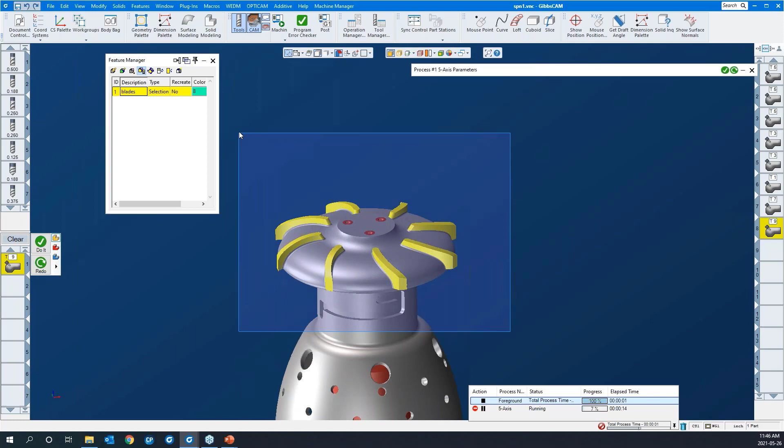Okay, one thing we're going to use, and it's available across the board, is this clearance blend spline. Rather than an abrupt lift and over and then back down, it actually creates a nice curve reposition move. And you'll have a look at that here. I'll say do it. Give it a moment to calculate. While it's calculating, GibbsCAM is multi-threaded. It allows you to continue on. I could develop new toolpaths. I can solid model, create a tool, what have you.

I'll go back to OpSim here. You can see those, and I'll make sure that we are on fixed part, like that. And hit play. So as it cuts down the walls, it actually tilts the tool away. Have a look at that. So it's automatic deburring cycles, and then you just exclude what you don't want.

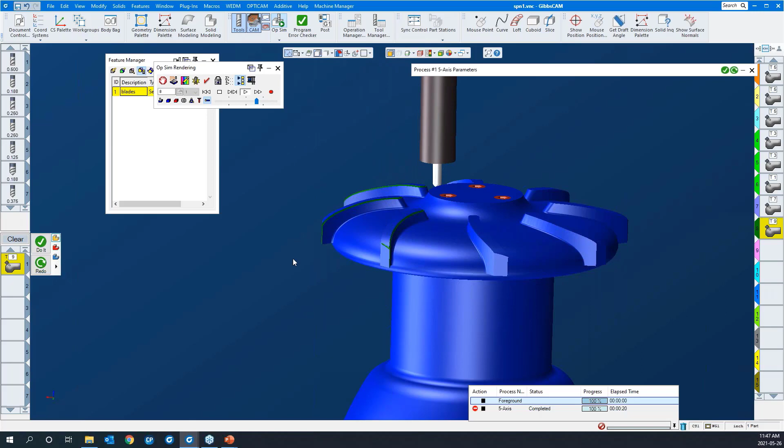Very powerful. And here's the clearance blend spline moves, okay? And again, nice soft repositioning moves, easier on your machine, okay? We have one more toolpath we're gonna look at, and we're gonna wrap it up here. And it's basically just a straight 3-axis finishing strategy.

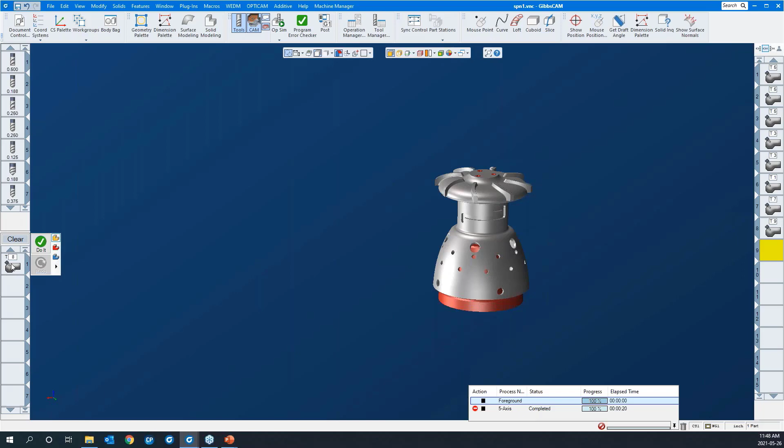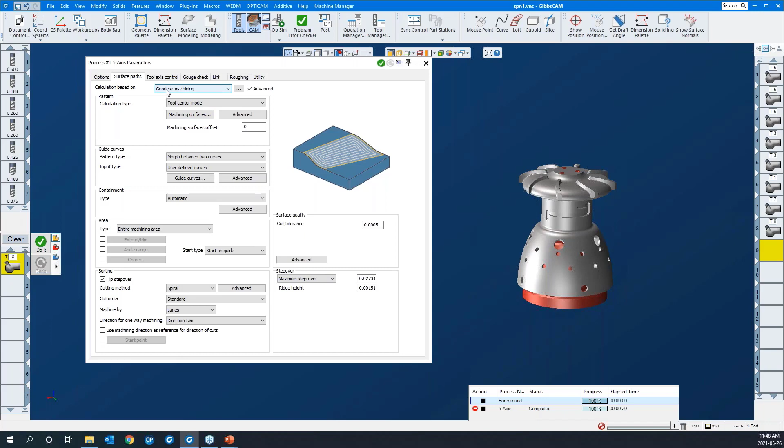Okay, I'll load it from the process list here. It's called geodesic machining. Okay, you guys may have heard about this, but it makes just high quality toolpath options. Okay, let's have a look at this. Under surface paths, it'll be geodesic machining. And what that means is that it puts a geodesic mesh over any surfaces you select and then machines that geodesic surface, okay? That's similar to triangle mesh, but the quality of the toolpath is just fantastic.

Okay, so we never did focus on that surface there. I'll go guide curves. I'll pick this upper edge and the lower edge here. Okay, you can see that it didn't behave the way I wanted. So what I can do is just right click here and I'll go 2D chain rather, and double click on this edge again. And you can see it now chained it up the way I wanted. I'll include that one as well. Say okay.

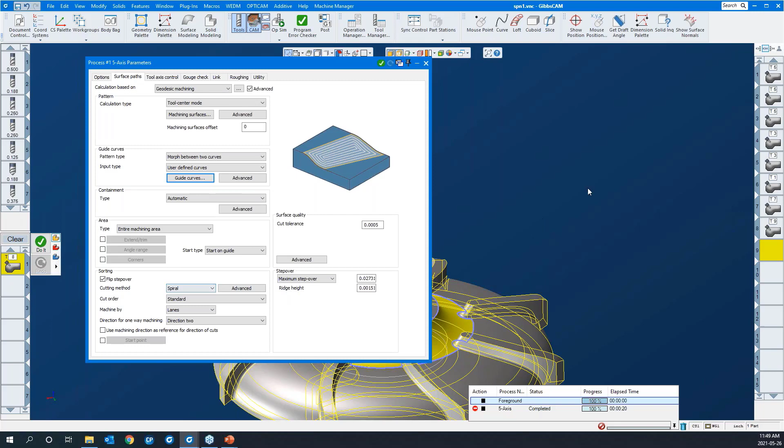Okay, we're going to spiral up or down based on whether we have flip step over on or off. If we are spiraling, you typically want to do a full pass or full contour at one depth at the beginning and end, and we'll continue with that. Here's your step over amount by step over or by ridge height. Tool axis control. In this case, we said 3-axis, gouge check, only where required. Let's create the toolpath.

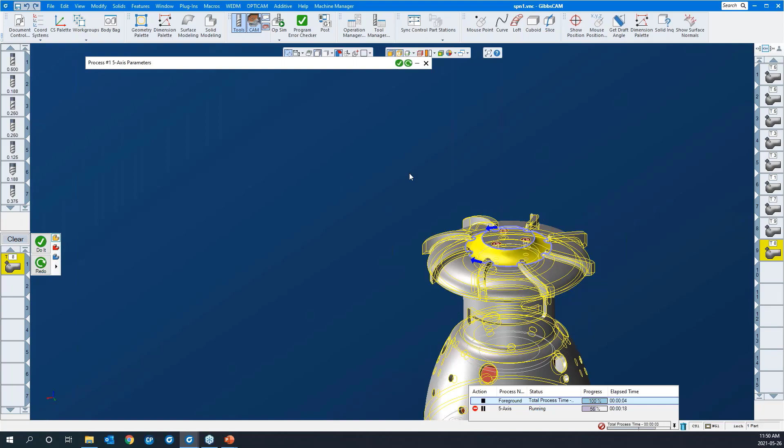I'll give it a moment or two to calculate, but very robust toolpath, very quick to calculate. Very high quality. Something like that. Let that run. Something like that.

So that's where we're going to end it off today, guys. As you can see, the 5-axis module in GibbsCAM is very powerful and easy to use. We used 5-axis strategies. We went to 4-axis. We went to 3-axis. Hopefully we showed you a lot in a short period of time. There's much more to it. This was only the tip of the iceberg. There's a lot left to certainly display.